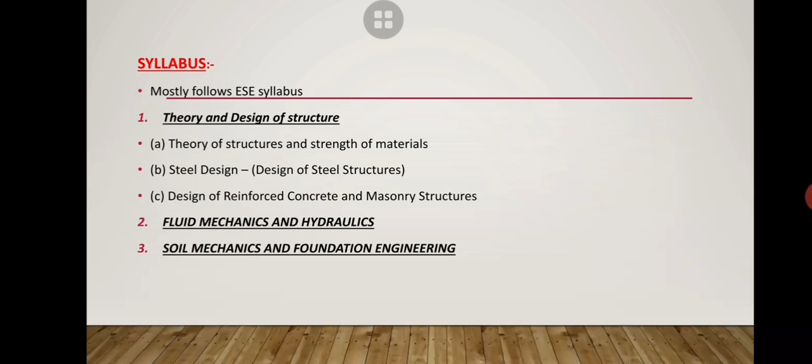So the first subject given in the syllabus is theory and design of structure. This subject contains three papers: theory of structure and strength of material has two papers - theory of structure and strength of material. Steel design, that is design of steel structure, and design of reinforced concrete structure and masonry structure. Friends, masonry structure is a part which comes from Engineering Services, and you will get maximum questions from masonry structure from Engineering Services.

Second, fluid mechanics and hydraulics. In fluid mechanics, you have to learn fluid properties: shear stress, shear flow, turbulent flow, hydraulic machines - these things.

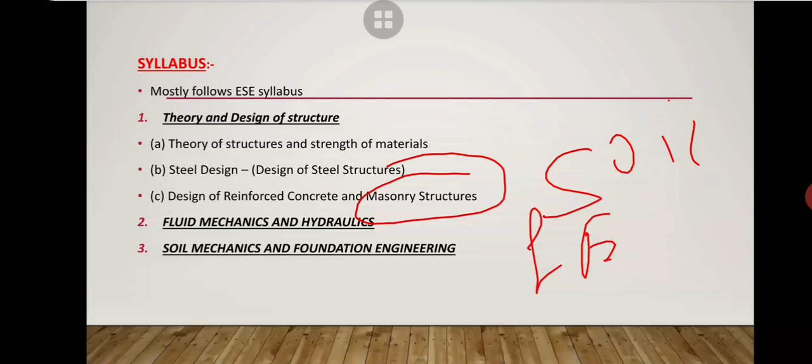And soil mechanics and foundation engineering itself is two subjects: soil mechanics and foundation engineering. In foundation engineering you will find questions from bearing capacity, pile foundation, deep foundation, and from soil properties, permeability. Those are the questions from soil mechanics, and you have to go through the concept of all these questions.

Next, surveying, construction material practice, planning and management. In construction material practice and planning management, subjects are building material, concrete technology, construction planning and management, quantity surveying. Friends, quantity surveying means this is estimation, a part of estimation.

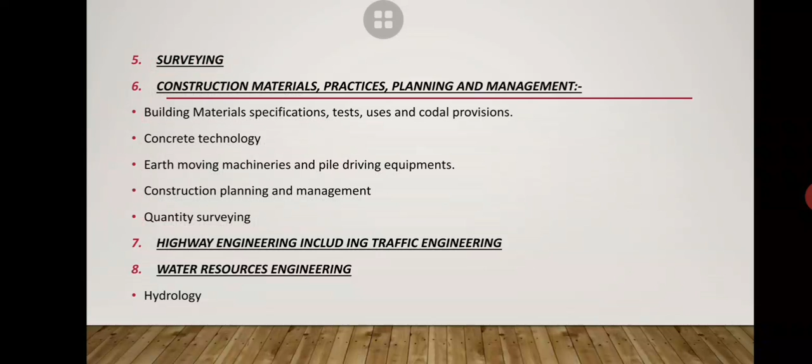Next syllabus, highway engineering and traffic engineering. Friends, here itself two subjects are already included: highway engineering and traffic engineering.

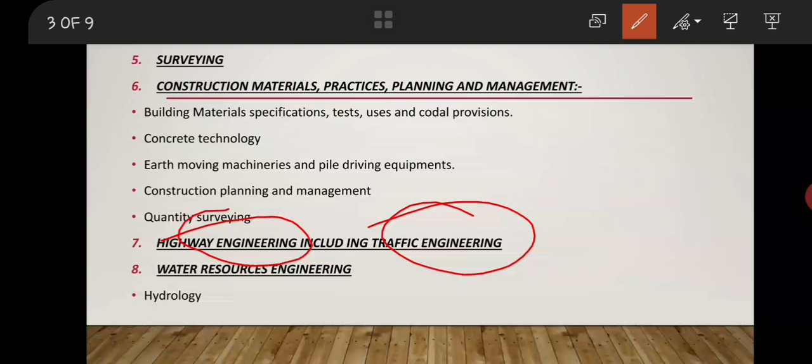And paper 8 is your water resources engineering. This subject contains hydrology, irrigation engineering, and hydraulic structure. Hydraulic structure means dam, such structures. Then the last part is your environmental engineering, which contains water supply engineering, wastewater engineering, and environmental pollution and control.

So friends, next let's go to how we give the exam - the exam pattern.

Friends, the exam pattern given by WBPSC has two stages. First stage is your written examination, second stage is your personal interview. Written examination contains 200 marks and your interview contains 100 marks. In the written examination there are 100 questions and each question carries 2 marks, totaling 200 marks, plus interview 100 marks. So total you will carry 300 marks.

You have to score out of 200, 150 plus as your safe score, because interview marks fluctuate each year.

Friends, the main thing is that duration for the questions is 2 hours, so don't go through more difficult numericals from Engineering Services. Go through simple numericals which could be solved mentally.

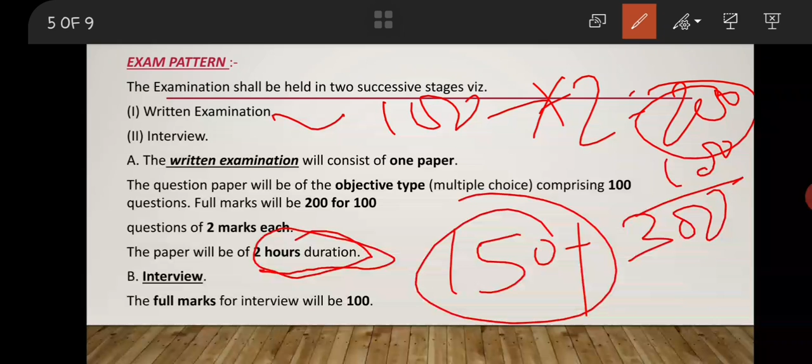Then coming to the next part, subject-wise question analysis - this is the curious thing we want. The first and most important subject is soil mechanics and foundation engineering, which contains 40 to 50 marks, and theory of structure and design of steel structure also contains 50 to 60 marks.

Environmental engineering contains 25 to 30 marks. Highway engineering contains approximately 25 to 30 marks. Construction material management contains 20 to 25 marks. Surveying contains 15 to 18 marks. Water resource engineering contains 15 to 20 marks. Fluid mechanics and hydraulics contains 10 to 12 marks.

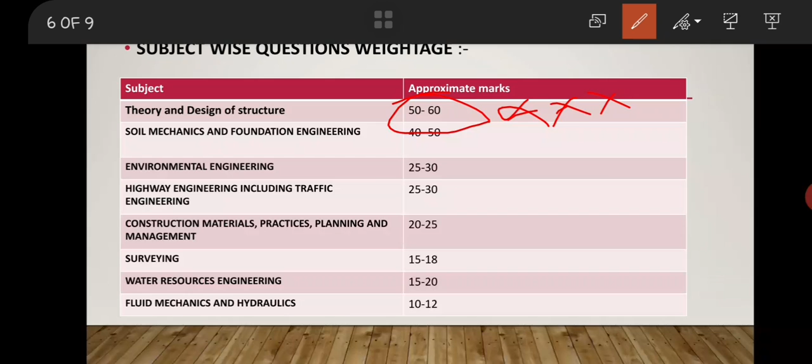Friends, these approximate marks I have found by searching previous years' questions, and from there I analyzed these are the questions asked in the exam.

Next, how we should boost our score. We have to practice as many conceptual questions as we can and learn conceptual subjects well from fluid mechanics, soil mechanics, and traffic engineering. These are the important subjects.